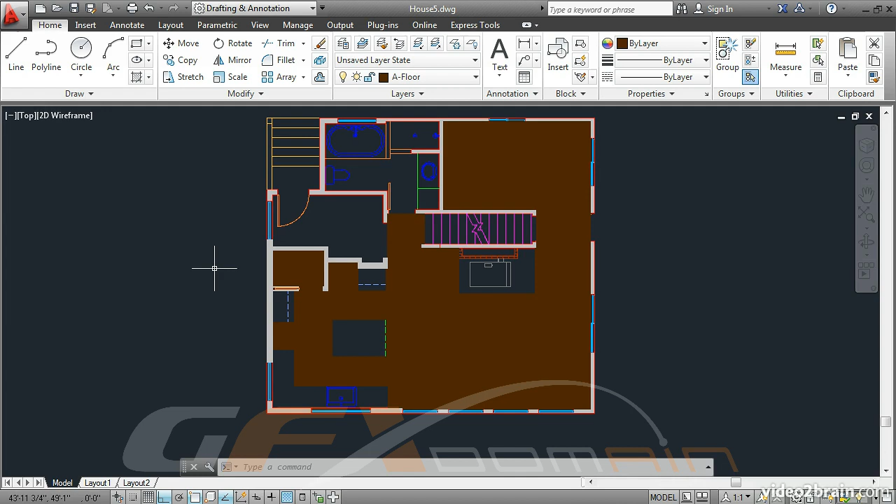Open the House 5 project file and zoom into the kitchen. Notice that the counters and the island line work is not visible. That's because it's underneath this floor object. You can change the order that objects appear on screen using the Draw Order command. Type DR, and that's the command alias for Draw Order.

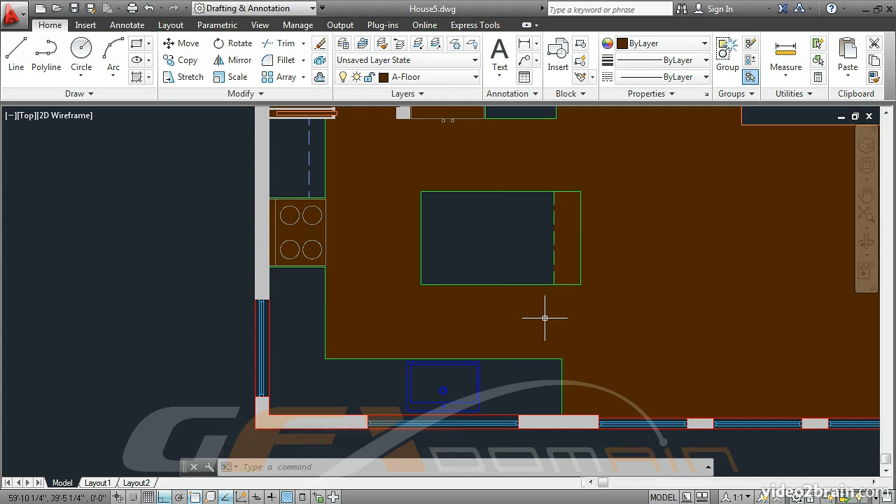Press Enter, and then select the floor. You might need to use a crossing window in order to select it. Because it is a hatch object, sometimes it can be tricky to select, so try different areas until it highlights. And then press Enter. Let's send this to the back. Click the Back option, and now all of the line work that was previously obscured now comes to the top, and we're able to see it.

However, I notice over here that the stove is hard to see because the floor pattern goes all the way to the wall, and likewise the refrigerator has the same story. I'd like to obscure the floor in those areas. To do that, we will create a Wipeout object that covers each one of these appliances. Go to the Annotate tab and click Wipeout here in the Markup panel.

The command line says specify first point or polyline. I'll use the polyline option and click on this refrigerator polyline. Erase polyline, yes or no? I'll say no. That creates a new Wipeout object. We succeeded in obscuring both the floor and the original polyline representing the refrigerator, so that's not exactly my intention either. Let's use the Draw Order command again.

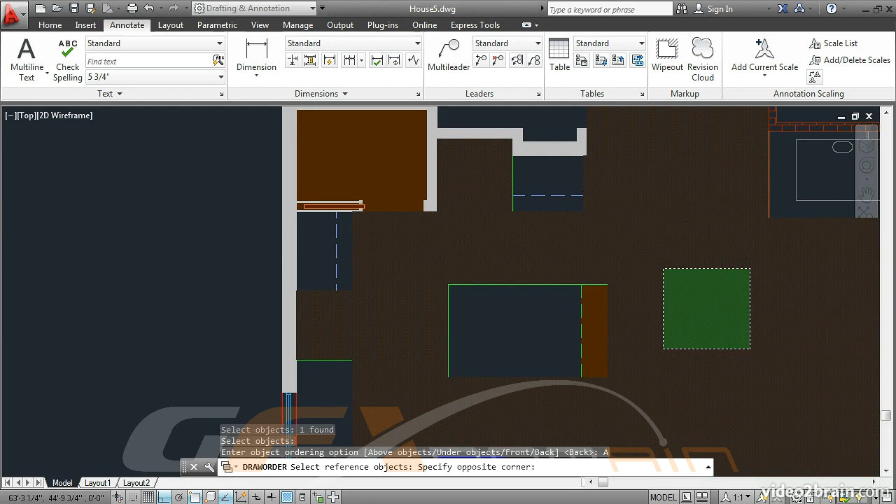DR, Enter, and then go over here and select right here, press Enter, and let's move that above the floor. So click Above Objects, and then click the floor with a crossing window. Press Enter, and the rectangle representing the refrigerator is now riding on top of the Wipeout object. And at the very bottom of the stack is the floor.

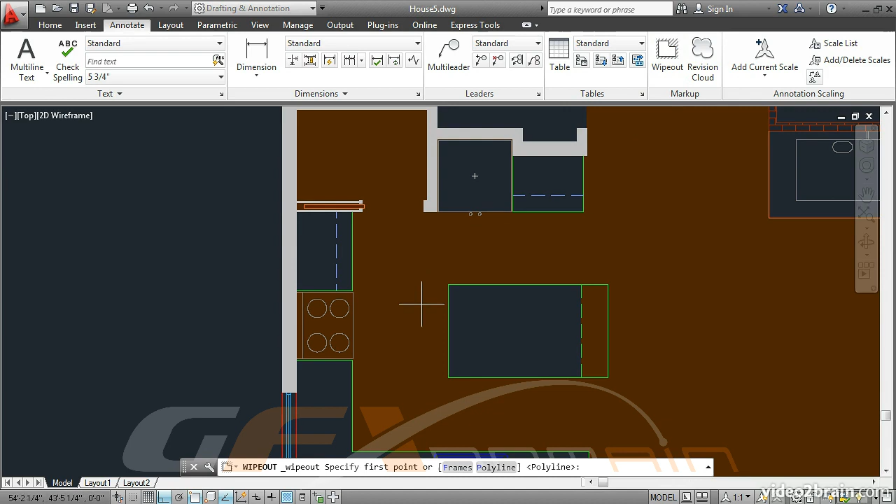Let's go over here and address the stove as well. I'll make another Wipeout object, and this time I'll draw it manually. I'll click 4 points, snapping to the corners of the stove, and then press Enter. Again, the Wipeout obscures the floor and the line work that represents the stove.

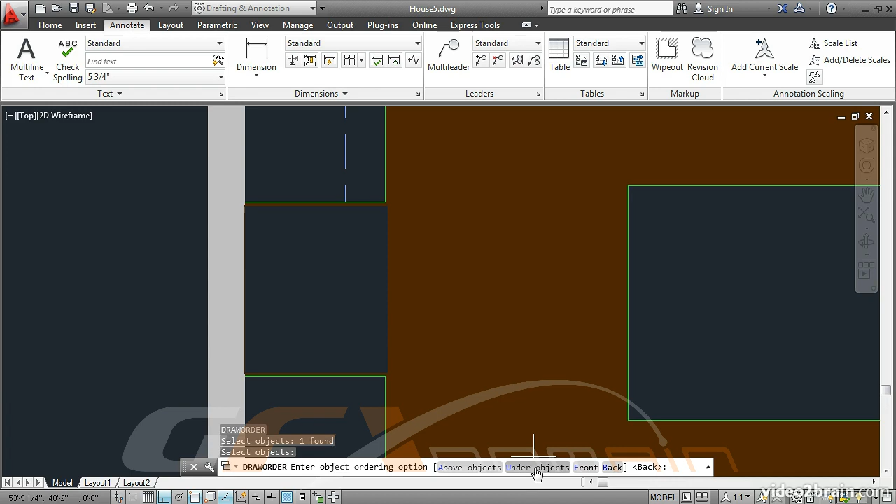Type DR, Enter, select the Wipeout, press Enter, and then move it under objects. Select Under Objects, and then make an enclosing window that selects all of the line work of the stove. Press Enter, and there we have it. The floor is on the bottom, the Wipeout is next, and the line work representing the stove is on top.

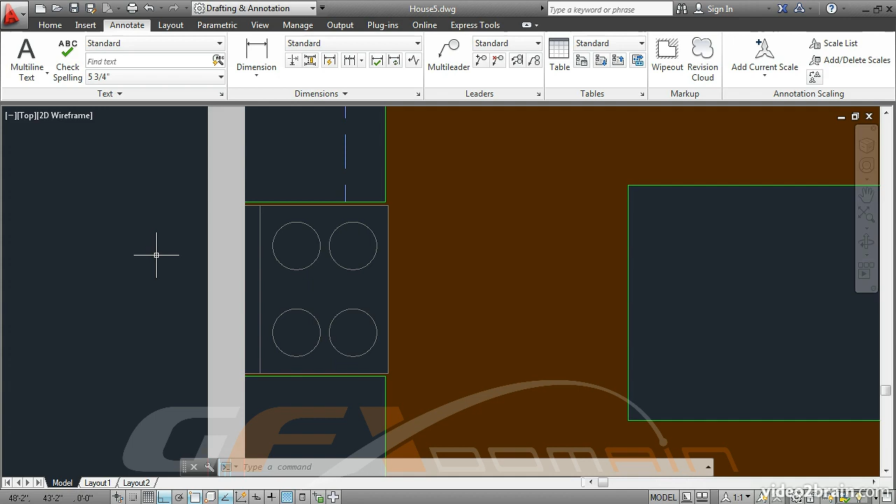Note that Draw Order doesn't change the three-dimensional coordinates of the objects. It merely changes the order that the objects are drawn in. In this video, you learned how to use the Draw Order and Wipeout commands to control which objects are visible and which are not in terms of object overlap.